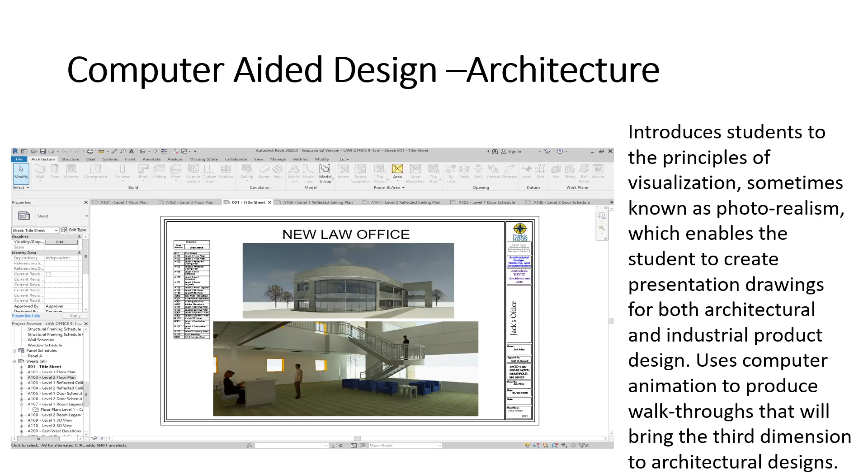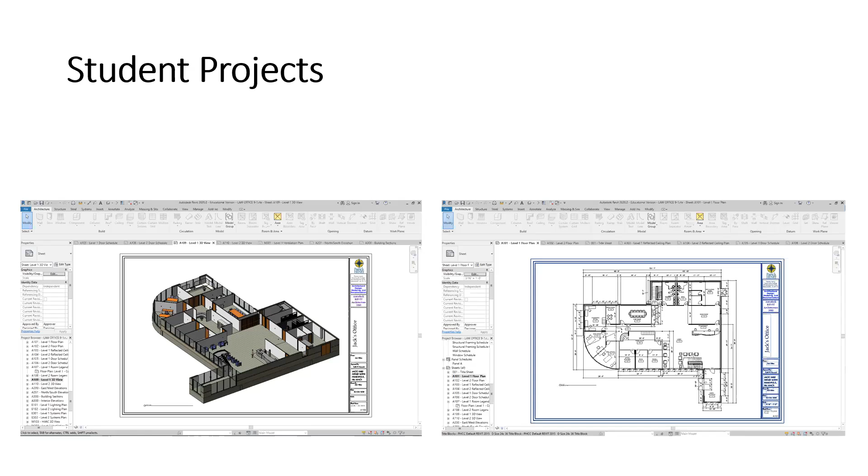Here are some of the other views of the same building that we saw on the most previous slide of the law office. On the bottom left side of the screen, we see a 3D layout of the first floor of that office building. On the right, we see a draft layout of that same room, which has the door schedule listed on it, as well as the various types of furniture and equipment located in the law office.

The other type of computer-aided design we teach here at Patrick Henry is engineering design. In engineering design, as opposed to designing houses and structures, they design parts and assemblies. Everything that you purchase in the store, from cell phones to ink pens to cars to motorcycles to aircraft carriers, will start off looking like this in a computer-aided design engineering graphics type of program.

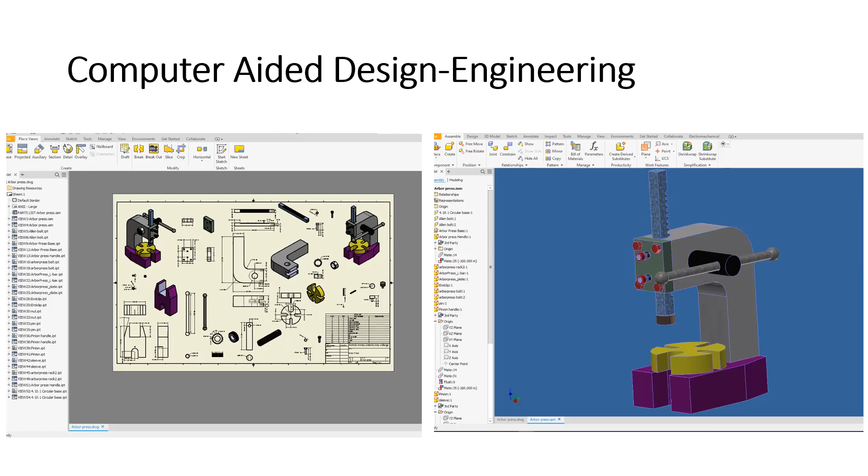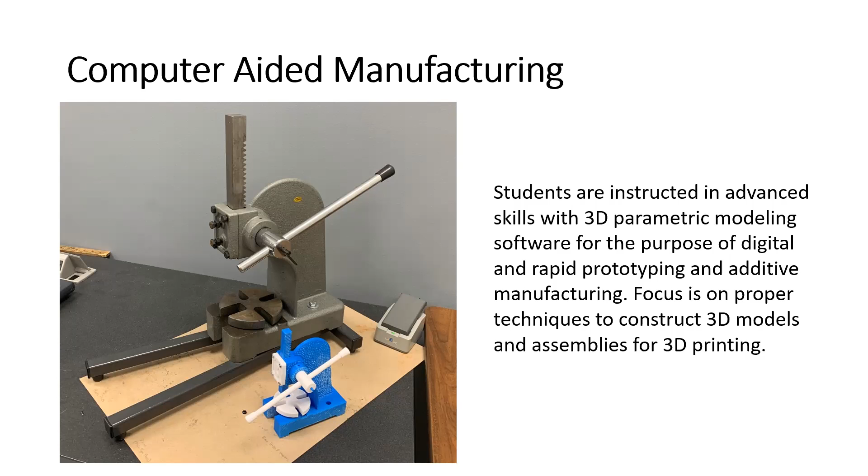In these classes, students are instructed in advanced skills with what's called 3D parametric modeling software for the purpose of digital and rapid prototyping and additive manufacturing. What you see in that little blue model would be an example of rapid prototyping through the use of additive manufacturing.

This is done through CNC, computer numerical control, which is the code that controls the machine that cuts out the parts. And CAM, computer-aided manufacturing, creates the tool paths for the tools used to either 3D print, route out, mill out, or turn with lathes parts that would go into an assembly. In this class, students have exposure to CNC equipment, including 3D printers, CNC routers, laser engravers, and vinyl cutters.

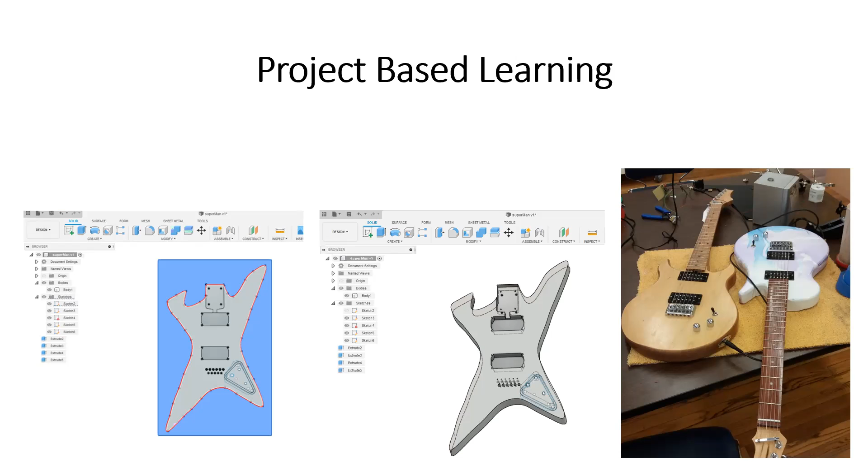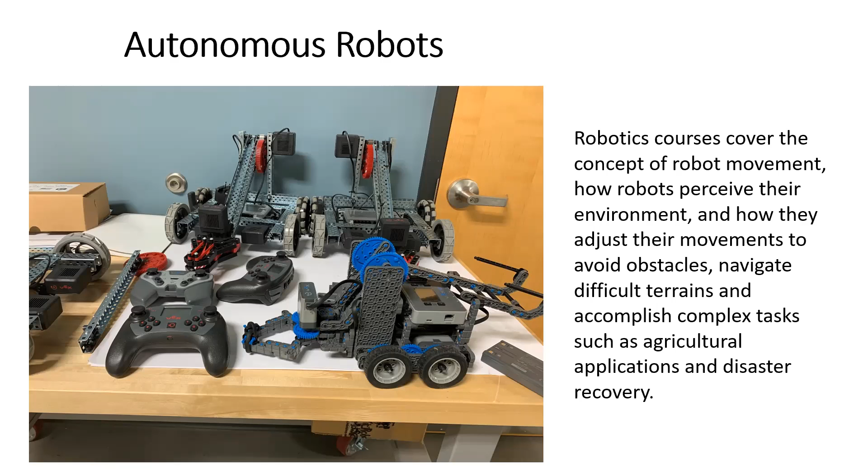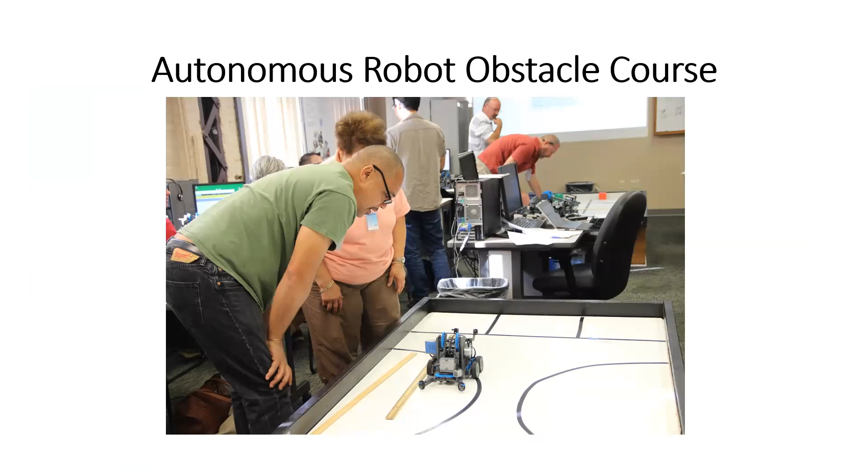Here's an example of an obstacle course that students would use with one of the smaller VEX robots, which they programmed to complete a series of tasks inside that little work area you see there on the table.

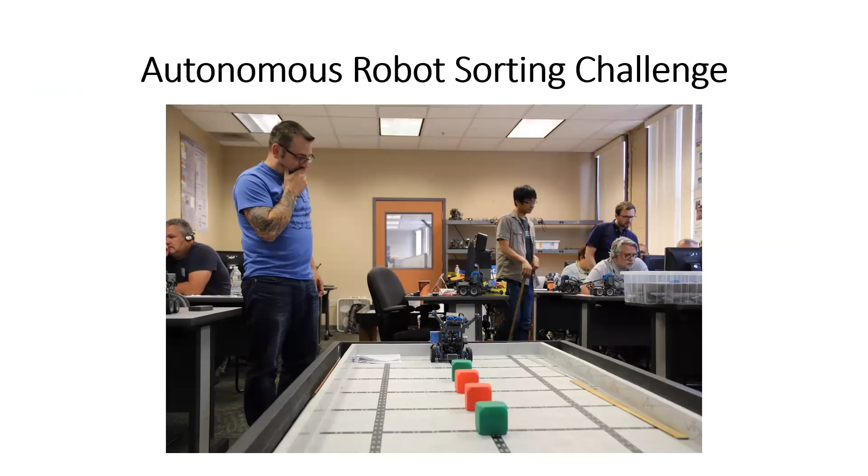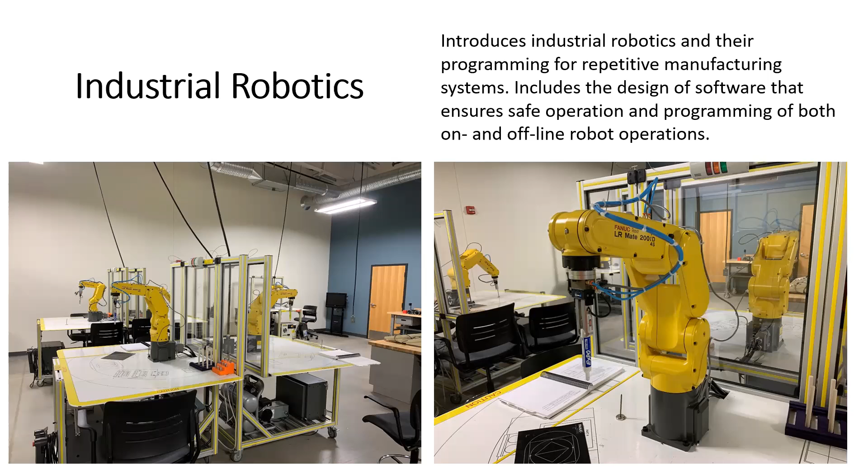The other type of robotics class we teach is an industrial robotics class. This introduces students to industrial robots and their programming for repetitive manufacturing systems, including the design of software to ensure safe operation and programming of both online and offline robot applications. These are the types of robots you might find, some smaller, some larger, in industry. If any of you have seen the show How It's Made, you'll find a lot of these types of robots used in welding applications, paint applications, and material handling.

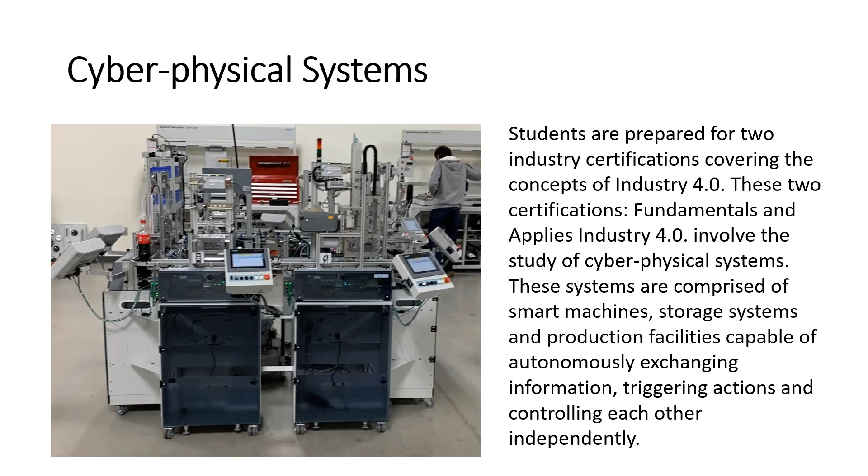I just want to highlight some of the things you've already mentioned. We showed a PowerPoint earlier of all the career study certificates and embedded certifications. I want students to know that upon successful completion, they'll earn the majority of everything shown on the computer screen, in addition to 3 to 4 career study certificates with their degree. So there are a lot of credentials you'll earn coming through this program.

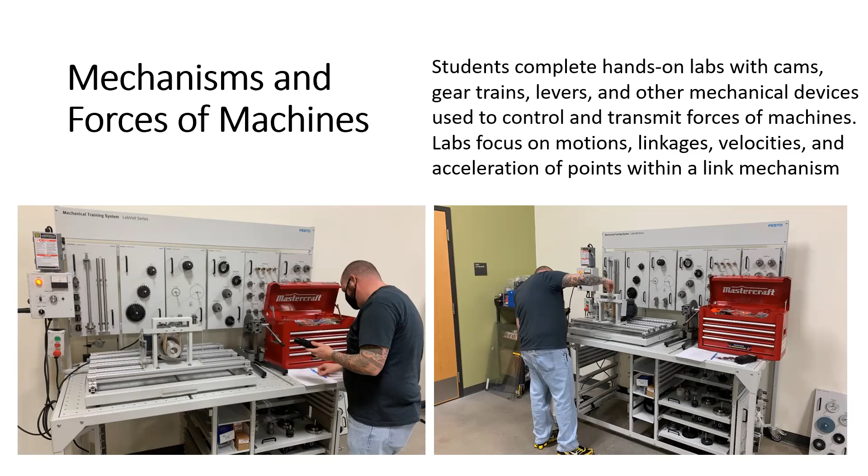We offer two levels of applied mechatronics, a Siemens certification. Mechatronics refers to electromechanical systems, combining electrical and mechanical elements, along with fluid power systems and computer engineering technologies like programmable logic controllers.

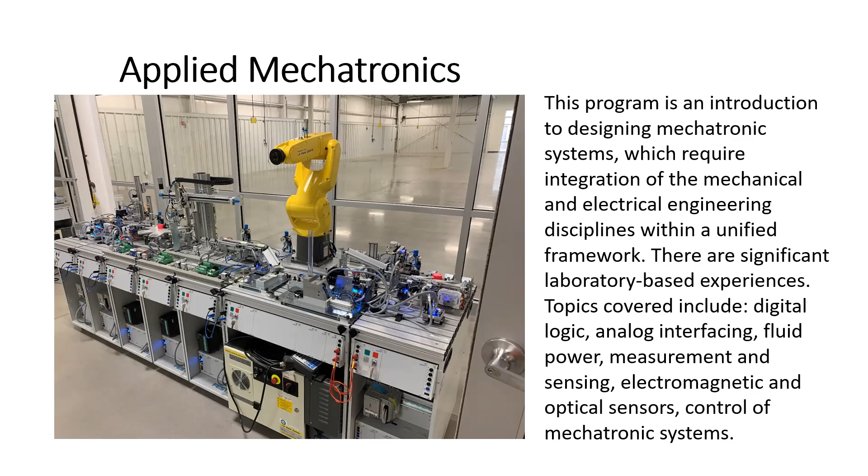This is one of the smaller systems we have. We actually have three of these systems, including one in Patrick County in the older Food Lion building.

In fluid power, we learn about pneumatic circuits, electropneumatic circuits, and hydraulic circuits. You'll build and troubleshoot pneumatic and hydraulic circuits in this class.

About 50% of what we do involves troubleshooting in your labs. I'll have you complete a lab, then step away for about five minutes while I introduce bugs into the systems that you'll have to solve.

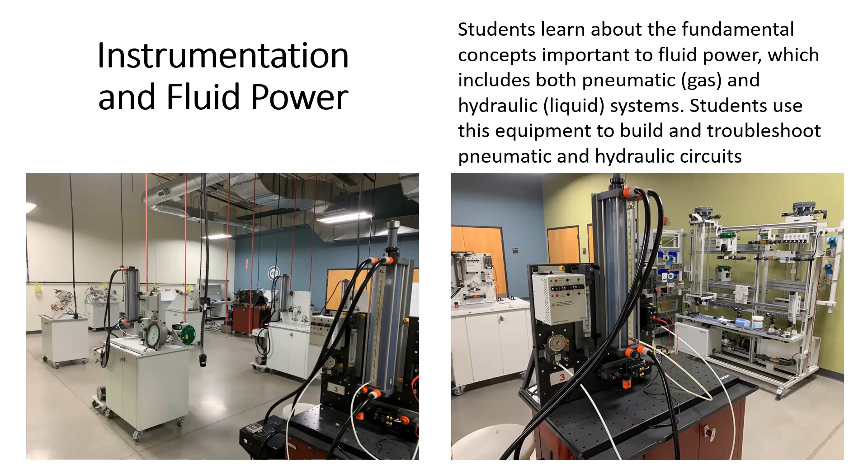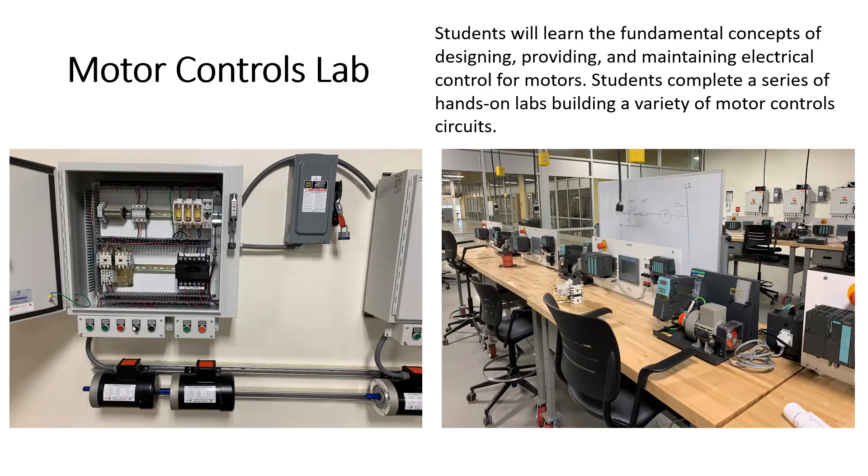Students will learn everything from the transformer on the pole out to the service lateral, wiring into the breaker panel or service panel in your home, and how to properly size a service entrance or panel for a single family dwelling, multiple family dwellings, and so on. You learn all the National Electrical Code that applies to installation of residential wiring systems.

When am I supposed to put staples in Romex? When is it supposed to be in conduit, and when is it not supposed to be in conduit, and so on.

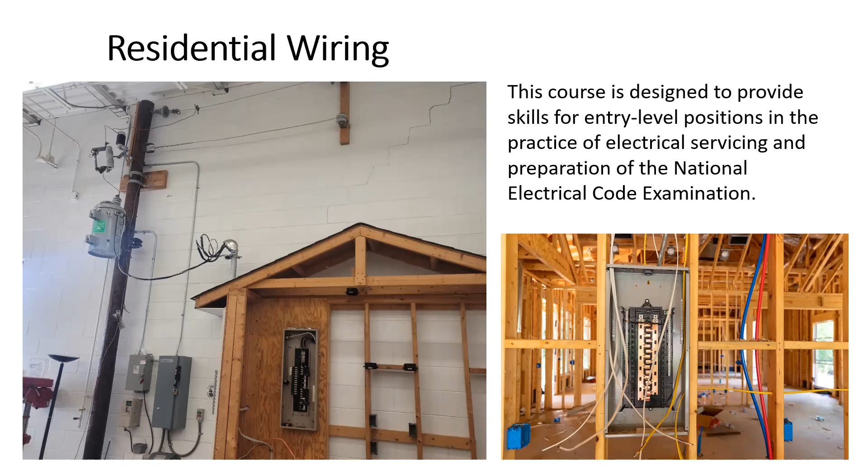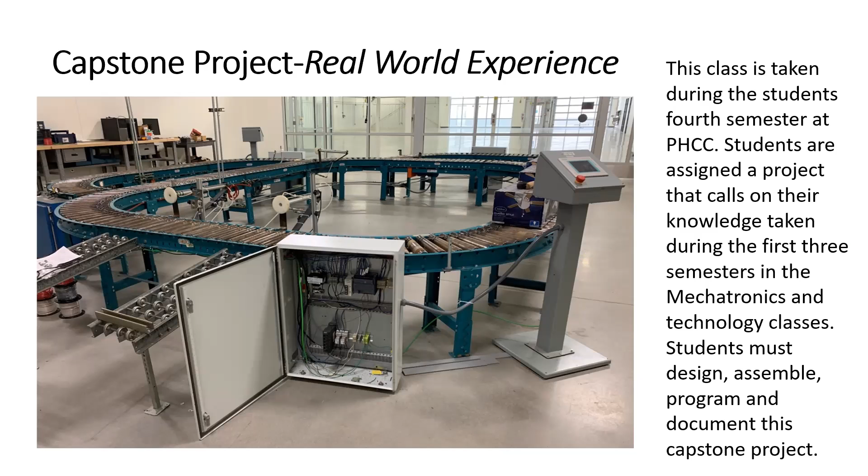Mr. Dillard, I think you actually put these in there, so maybe you could touch on some of this stuff.

Let me unmute here. Sure, I sure will.

A lot of times people are interested in the types of jobs they can get after just a 2-year degree, or even with some of the career study certificates you get here at Patrick Henry Community College. I did a search on Indeed, and I'd recommend any student considering a career choice go to these web job searches, look up those jobs, and find out what type of education, training, and experience you need. Then see if that dollar figure meets your happy point, so you can plan your career out.